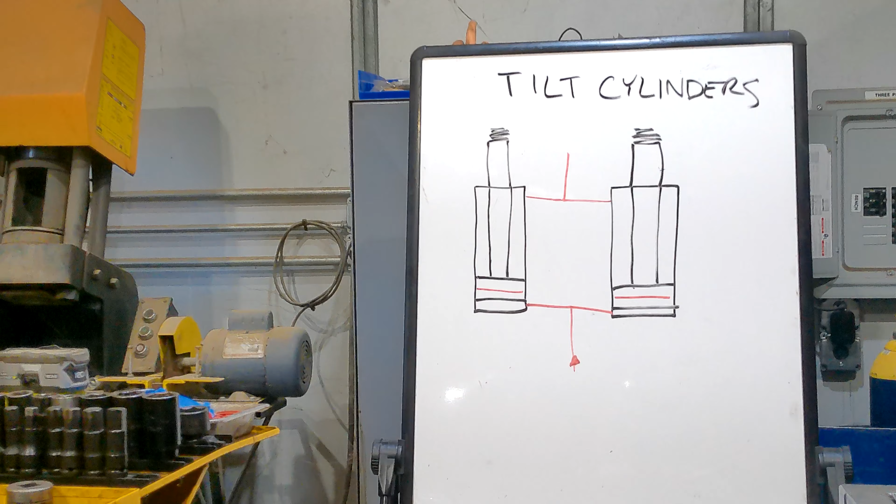Today we're going to do some in-house troubleshooting on our forklift. This would be the same as if we were going in the field to troubleshoot. I'm just going to show you what I'm going to do here.

So what we have is there's two tilt cylinders on the mast of our shop forklift. I've changed the seals in these before. They start leaking out of here, so I did the one, and then this one started leaking. And now one of them, I remember I didn't pull the rod out, I just did the head, because we never have time to work on our own stuff, so I just did a quick and dirty to stop the leak. But now the mast, when it's sitting there or has a load on it, the mast is creeping forward.

So my first guess is that one of these piston seals is bad, because they're teed in together here, at the bottom and at the top, and they work together. But if one of them's leaking, what happens, because you've got pressure, the mast has weight on it, and this is where the oil is.

There's pressure in here on this side, the rod side. So if you put a gauge on this right here, say there was a gauge in here, you would see, if you had some weight on it, there'd be a little bit of pressure on this because the mast would be forcing this pocket in here where the rod is. So the problem is the displacement is smaller on the rod side than on the piston side down here, okay?

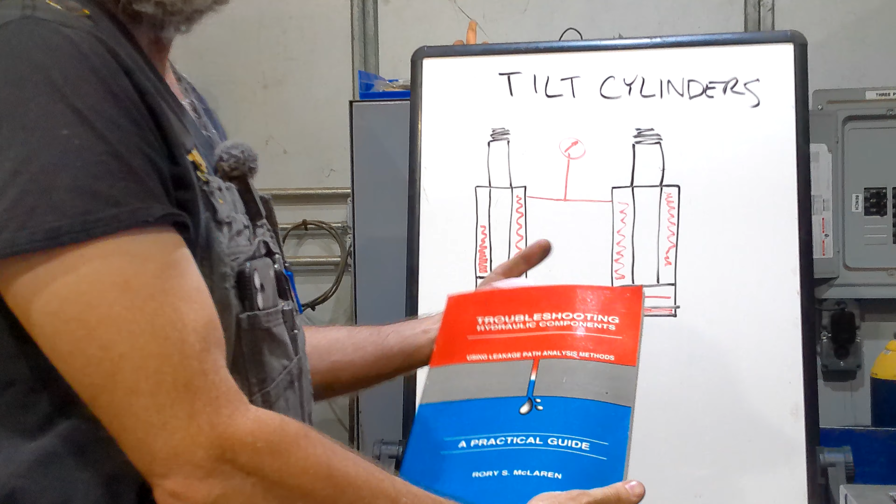So what I'm going to do is use the Rory McLaren technique, and there's a book here. About 30 some odd years ago, I took this class over in Utah by Rory McLaren, and it's troubleshooting hydraulic components using leakage path analysis methods.

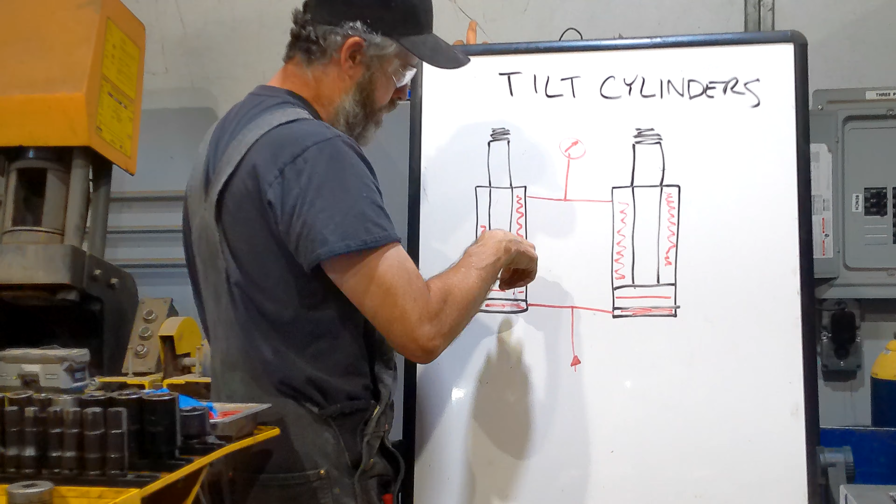I use this once in a while, so what I'm going to do to determine which cylinder it is, I'm going to undo this top side, and then I'm going to put a porta pump on this thing with a gauge on it, and I'm going to pump these up, and I'm going to see which one bleeds off so I know which one to pull off. I'll show you the video on that, but I wanted to show you how I'm going to do it and why.

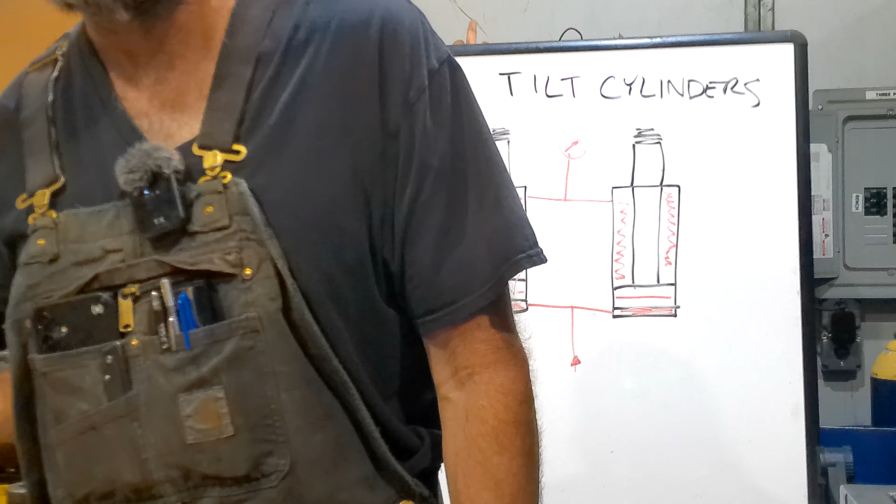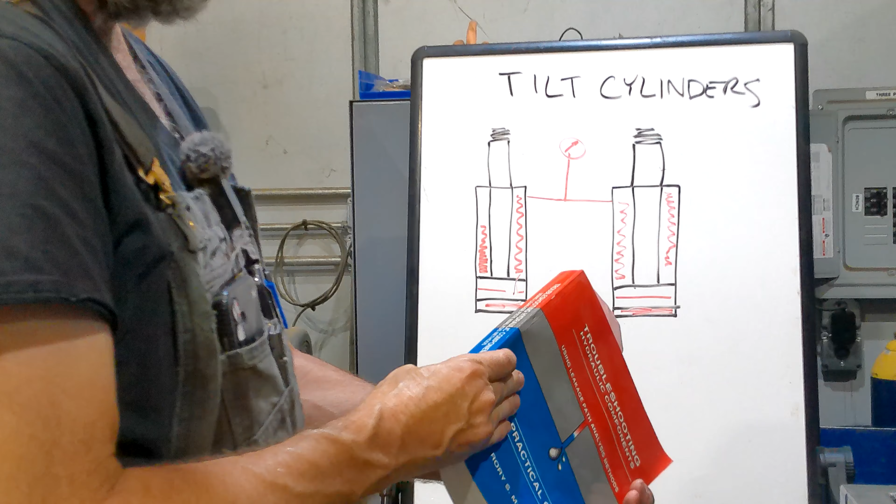This would be the same if you're going out in the field on a piece of equipment, but here's that book again. Like I said, this is 30 some odd years ago, but I wanted to give a shout out to Rory because he's still alive. It was 30 years ago when I took this class from him, so that's the book, and I think you could still get it. If you punch his name in, Rory McLaren, they actually have a school, and I think he's still doing it, and they have trainers and stuff. So take a look at his stuff. This guy's a very intelligent individual for sure.

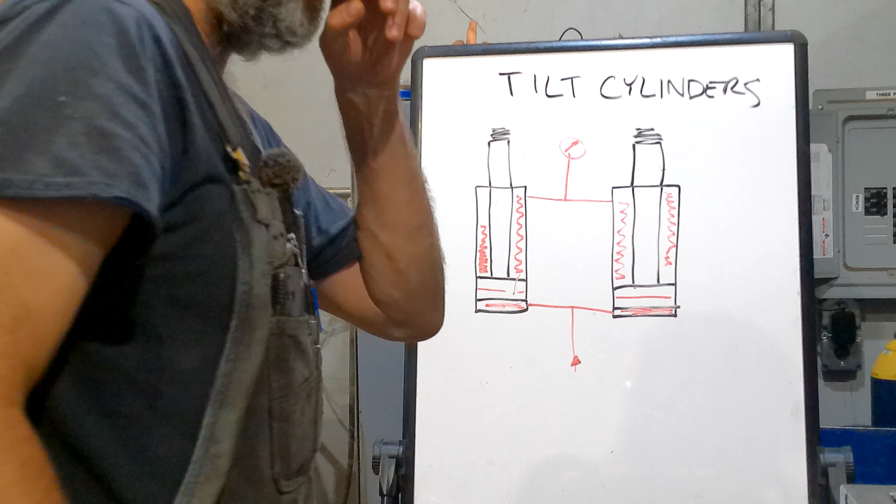So that'll be that. You'll see the next video. I'll get set up and I'll show you what we're going to do on this. Stand by.